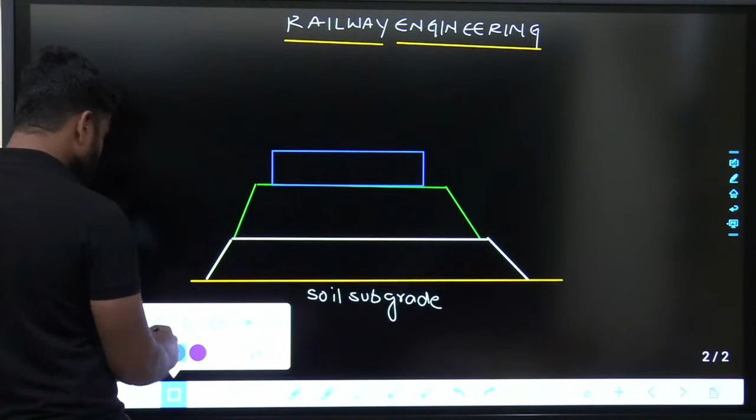on the top of soil subgrade there will be formation. Formation means indirectly there will be an embankment. On the top of the embankment there will be ballast. Ballast can be like this, or ballast can be in any way. It's not necessary that it has to be in the form of embankment. So this is ballast, and on the top of the ballast there will be sleepers. On the top of the sleepers, there will be rails.

Generally we go for flat footed rails. There will be I sections and there will be flat footed rails. So these are rails. Generally it will not be straight, it will be provided in the form of slope. This is sleepers, and this one is ballast. Sleepers are generally made up of concrete blocks, precast concrete, which we are using recently. Sleepers can be timber sleepers also, whatever the type of sleepers.

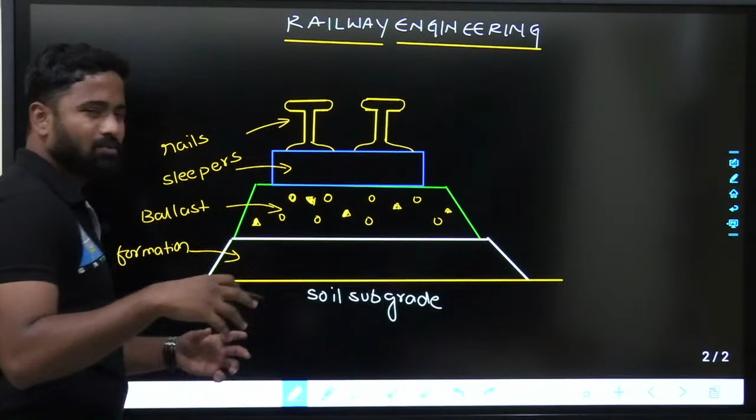This is the cross section of the rails. The rail would be like this; I am just showing the cross section. There will be ballast and there will be formation. Why is ballast provided? Ballast is provided from cushioning point of view. It is generally made up of boulders, gravel, all those things, and below that formation, that means you can provide soil subgrade or an embankment type of thing.

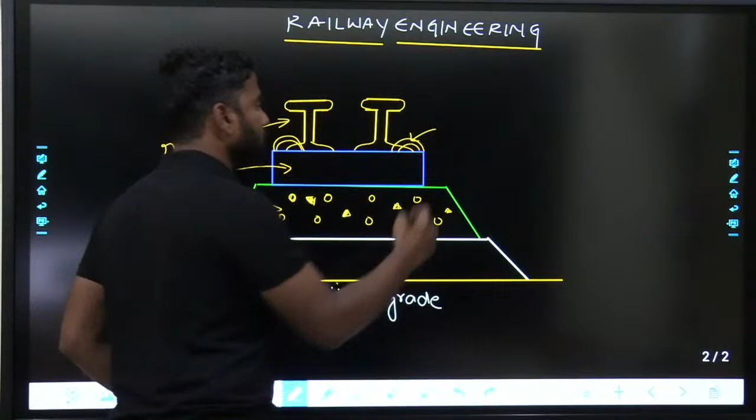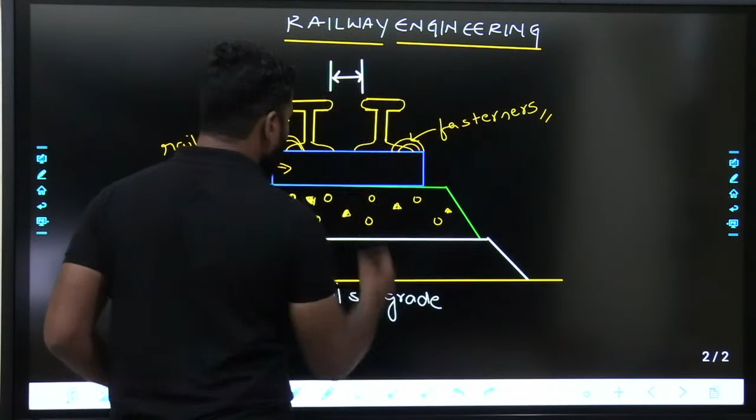On the top of it you are going to provide rails, and generally there will be fasteners between the rails and the sleepers, that means it is fixed to the sleepers. This is fasteners. And the distance between the inner face to inner face of rails, or running face, is called the gauge distance.

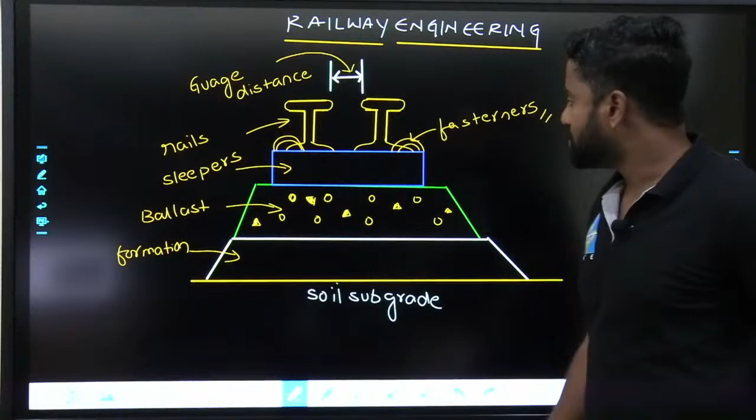Why is ballast provided? Ballast is provided for cushioning effect. Like when you sit on your bed or on a sofa, there will be some cushioning effect. So when a train comes on it, there should be some cushioning effect. That cushioning effect is provided by ballast, and sleepers are provided to hold the rails in position. So this is the cross section of the rail, and based upon the gauge distance. So what is gauge distance?

Gauge. It is the distance between inner face, or you can also say running face of the rails. It is the distance between inner face of the rails, or I can also say running face of the rails.

Based upon the gauge distance, the track is divided into several types. First one is broad gauge. So the gauge distance in meters, 1.676 meters. Broad gauge is generally given as BG. Next one is meter gauge, MG. The distance is generally 1.0 meters.

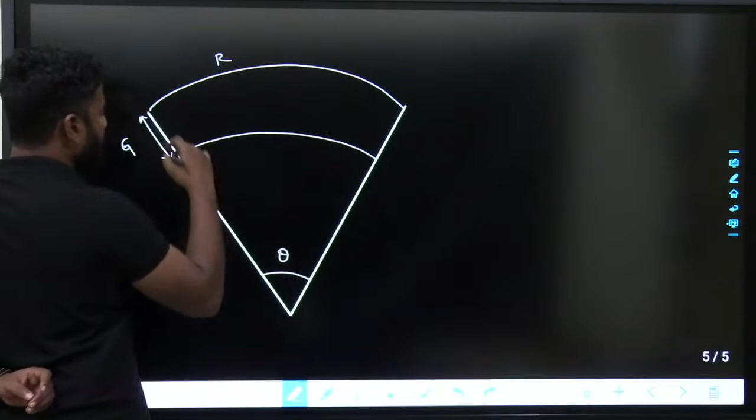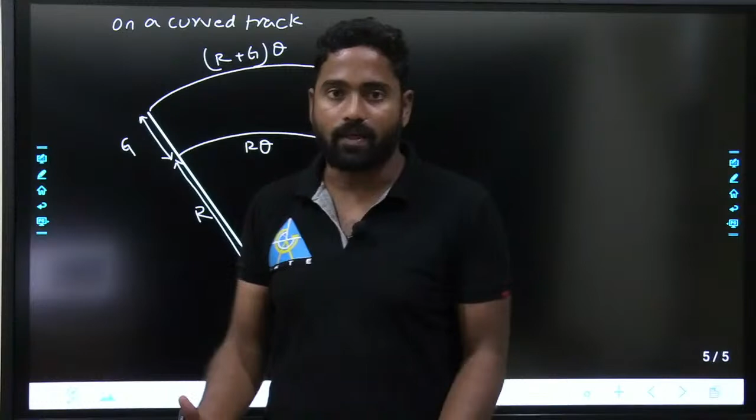Now if this is the radius r and this is theta, the distance traveled by this would be more. On a curved track, this would be (r plus g) times theta and this would be r times theta. So the distance traveled on the inner rail is less compared to that on the outer rail. You have to design it such that the distance on the inner rail is less and on the outer rail is more.

So what happens is, when the train is moving on a curved track, there will be centrifugal force. Whenever there is movement on a curved track, there will be centrifugal force acting outwards.

Centrifugal force will be acting outwards, right? So if centrifugal force is acting outwards, the wheels go like this. If the wheels go like this, then what happens? The smaller diameter D2 comes on the inner rail, and the larger diameter D1 goes on the outer rail. That means it moves like this. D2 comes on it like this and D1 moves out.

That means the diameter of the wheel on the outer rail would be D1, and the diameter of the wheel on the inner rail would be D2. D1 is more than D2, right? So if D1 is more than D2, the distance traveled on the outer rail is more than the distance traveled on the inner rail. Distance traveled is indirectly the perimeter, so pi D1 will be more than pi D2. So this satisfies the condition: the distance traveled on the outer rail should be more than the distance traveled on the inner rail.

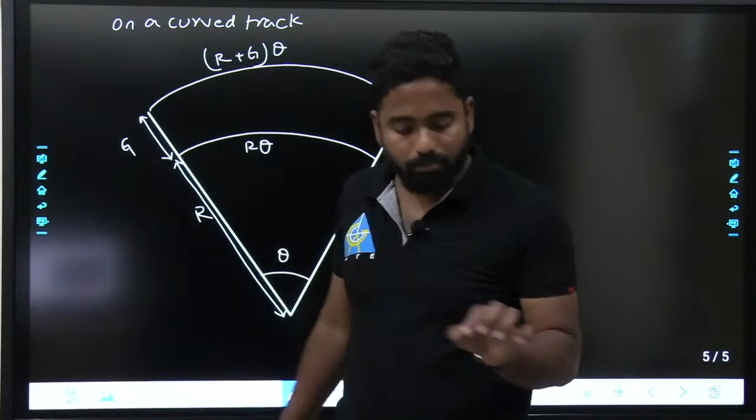When you see it in plan, when your wheel is going on the curved track, the distance traveled on the outer rail should be more than the distance traveled on the inner rail. This is satisfied only if we provide coned wheels. If we provide straight wheels, it will not move. The diameter on both will be the same and it gets stuck over there. Fine. That is the reason.

Coning of wheels is majorly provided keeping the curved track in mind. The distance traveled on the outer track should be more than the distance traveled on the inner track. That is the reason coning of wheels is generally done. The major part of this is satisfied by coning of the wheels, and some part is satisfied by skidding and slipping. Okay. So that is what happens on the curved track.

And on the straight track, what exactly happens? On the straight track, rigidity of the wheel comes into the picture. Let us say your train is going like this. There will be movement in the trains, right? The diameter of the contact at this point and at this point should be the same. If the diameter of contact is the same, then only it moves straight. Are you getting it?

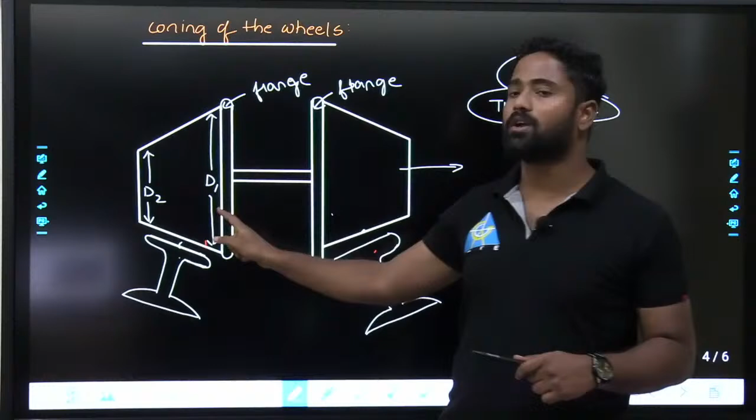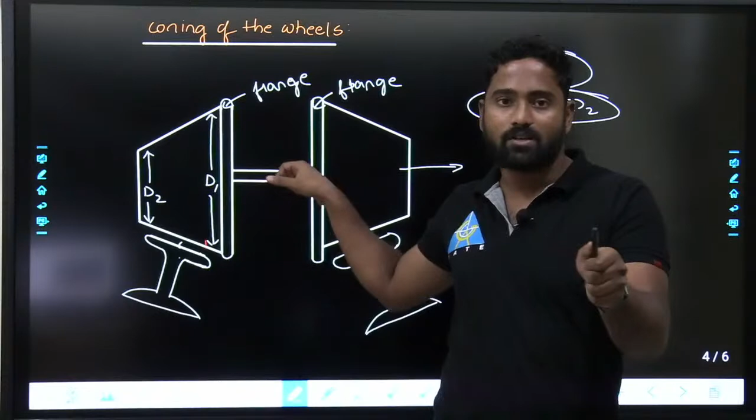If the train gets deflected sidewards, the diameter on one rail is more than the diameter on the other rail. That means this will try to move a greater distance compared to that one, so it tries to go like this. It is not flexible; this is a rigid axle. So the rigid axle pulls like this, and it slowly becomes straight. So that is the idea. On straight track, in order to avoid derailment, or to keep the wheel exactly at the center, we do the coning of the wheels.

So this is better understood if I show a video for you. It is on YouTube actually. There is a nice video here. Yeah, this video.

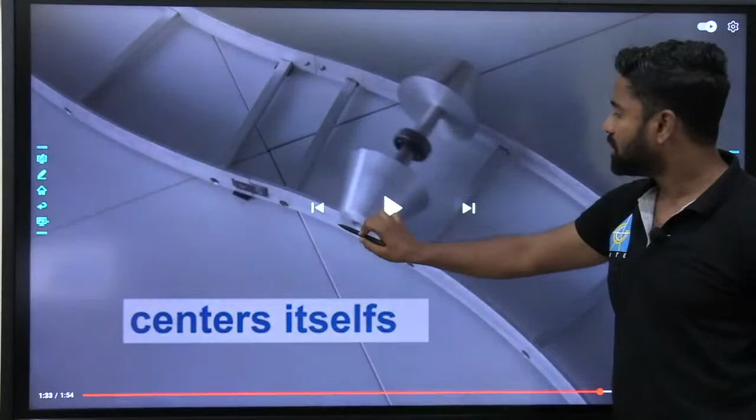And finally, if you are providing a conical tread with a rigid axle, meaning the axle is rigid and properly fixed, and it is coned like this, then you can see that if it is moving on a circular track, it adjusts itself. Are you getting it? So if you see here, on the outer rail the diameter will be more, and on the inner rail the diameter will be less, so that it can traverse the path easily. That is the idea. Fine.

So any doubts in this? You can ask me. Any doubts in this coning of the wheels?

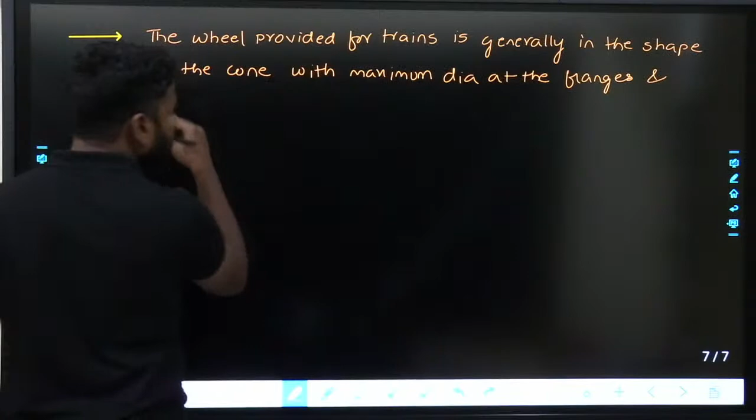With maximum diameter at the flanges, and minimum dia at the other ends. Purpose: on straight track.

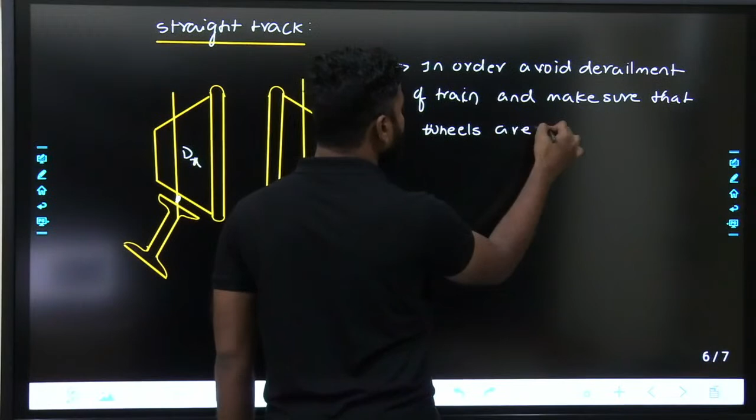On straight track, in order to avoid derailment of train and make sure that wheels are exactly at center. We make sure that wheels are exactly at the center.

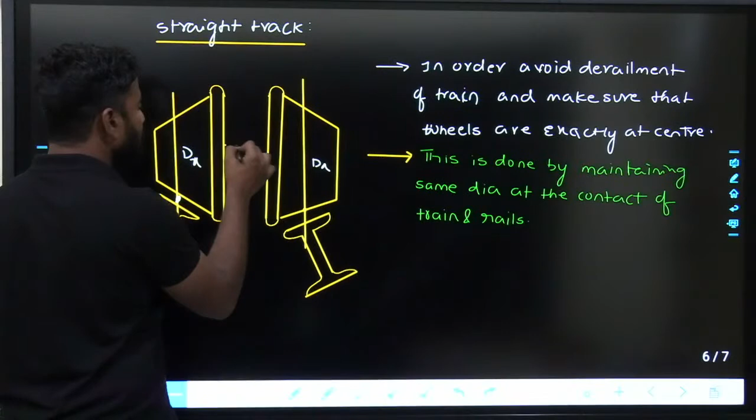How it is done? This is done by maintaining same dia at the contact of train and rails, and also due to the rigidity of the axle. This is the first purpose on the straight track.

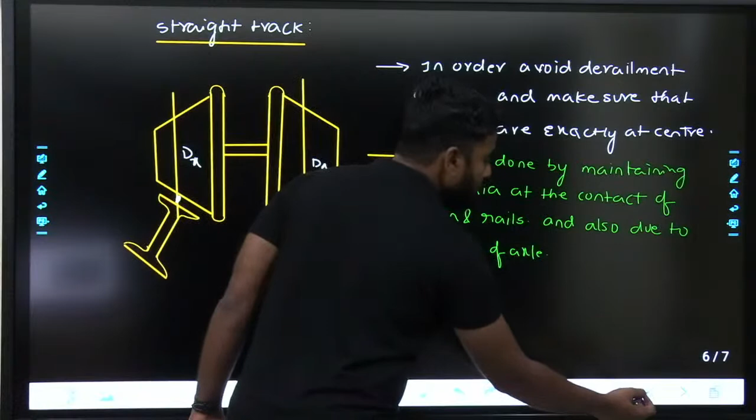And then on curved track, the major purpose is in order to make sure that distance traveled on outer track is more than distance traveled on inner track. Distance traveled on outer track is more than distance traveled on inner track.

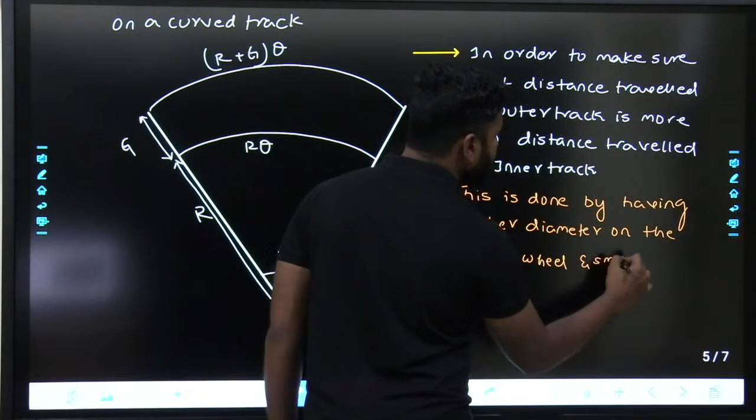How it is done? This is done by coning of the wheels. This is done by having higher diameters on the outer wheel, and smaller diameters on the inner wheel. On the inner wheel means on the contact of inner wheel.

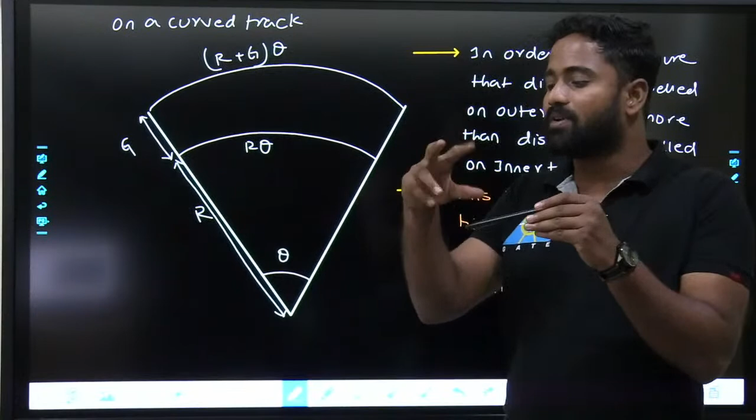Okay, smaller dia on the inner wheel and larger dia at the outer wheel. When it is moving like this, on the outer wheel there will be larger diameter, on the inner wheel there will be smaller diameter. And there are other purposes also, that it avoids wear and tear of the rails. Wear and tear means rubbing effect would be very less. If you provide cylindrical tread, the area of contact will be more, so wear and tear would be more, whereas here the rubbing effect would be less.

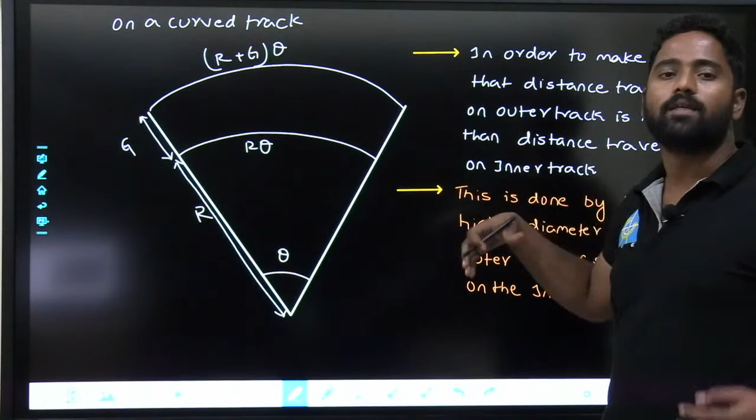Fine. So only a part of this is satisfied by providing different diameters. The other part will be satisfied by the skid and slip. So these are the major purposes of the coning of the wheels. You can take another note point also here. It is provided in order to reduce wear and tear of rails and wheels. Fine. Any doubts in this? You can ask me.

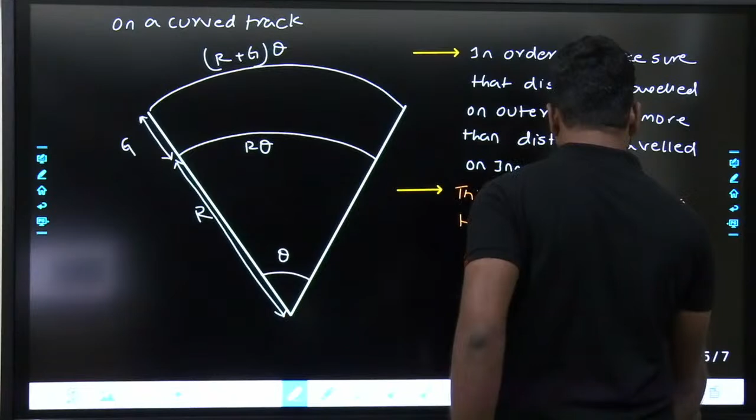Rahul Gupta, rail slope. Rail slope is the same as that of cone slope, and generally what is the cone slope? Slope is 1 in 20. Rail slope is also 1 in 20. Fine. This slope is also 1 in 20 and this slope is also 1 in 20. Any doubts? Any doubts, guys?

Any doubts, guys? No doubts? Fine. So this is coning of the wheels.

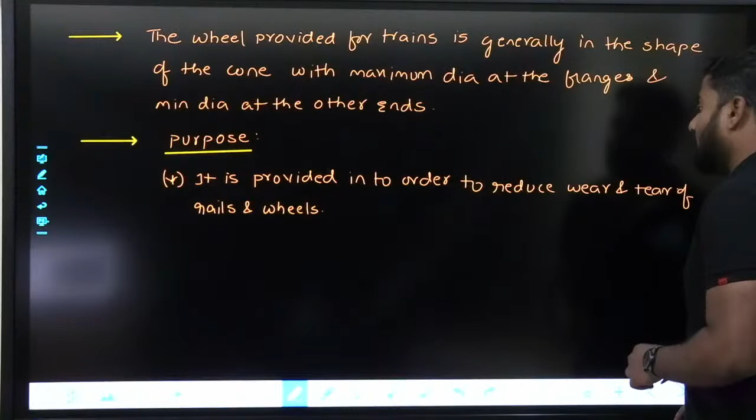Next one is long welded rails. LWR. Long welded rails, short welded rails. What are these things? From exam point of view, I am discussing only one thing, that is long welded rails. Generally, what is the length of the rail? Length of the rail would be approximately 12.8 meters, 13 meters. Generally available length is 13 meters. This is 1 meter, so 13 pieces of this, like 13 meters.

One rail is available in 13 meters, but your track will be for kilometers and kilometers. So generally what you will do is you will join one rail with another rail. When you are joining, the joints are the weakest points. Weakest point means when load is applied at the joints, there can be failure. So we have to make sure that there will not be any failure at the joints.

So what we do is we generally weld it properly, so that both the rails will act like a single unit. So joints we generally try to avoid by welding. Fine. So long welded rails are provided for track of long length. So that is long welded rails.

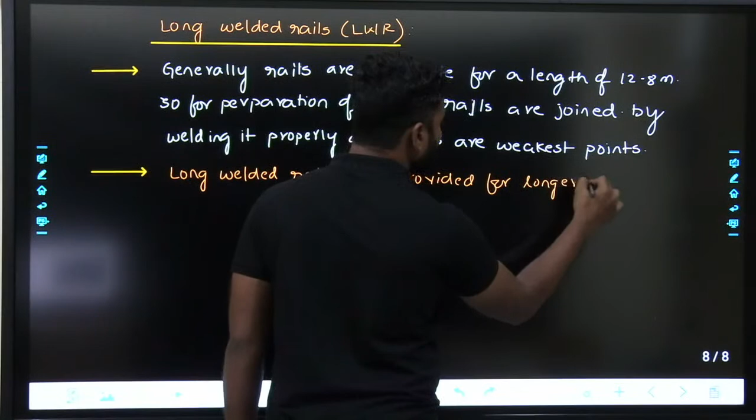As joints are weakest points, those are welded properly. And long welded rails are provided for longer lengths.

And if there is a joint, then because of increase in temperature, there will be temperature effects. In rigid pavement also we provided expansion joints and contraction joints, so that with a change in temperature it can expand or contract. But here those gaps are not provided, because rails are not allowed to expand or contract. They are welded properly. There will not be any gap between rail and rail, so no expansion is provided.

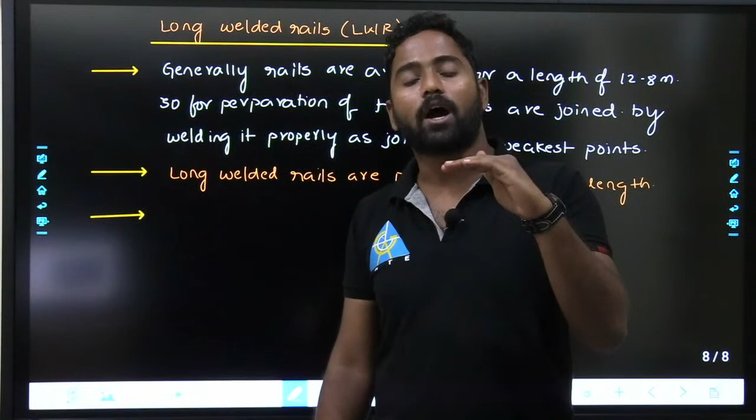If no expansion is provided, then stresses are developed. The stresses developed due to temperature are generally taken by sleepers and fasteners. The fasteners are connected to the sleepers. So a sufficient amount of sleepers is to be provided. Are you getting it? So what exactly I am trying to say is, let us say this is the track, these are sleepers.

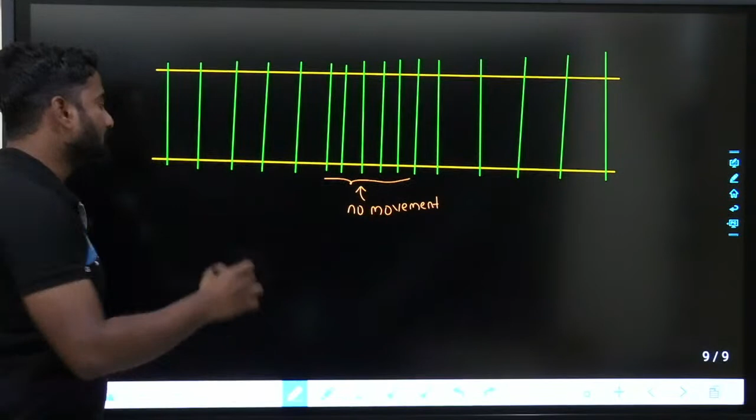Let us say you are providing long welded rails. At the central portion of long welded rails, there will be no movement, because more sleepers are provided. But at the ends of the long welded rails, there is possibility of expansion. That length is generally called the breathing length.

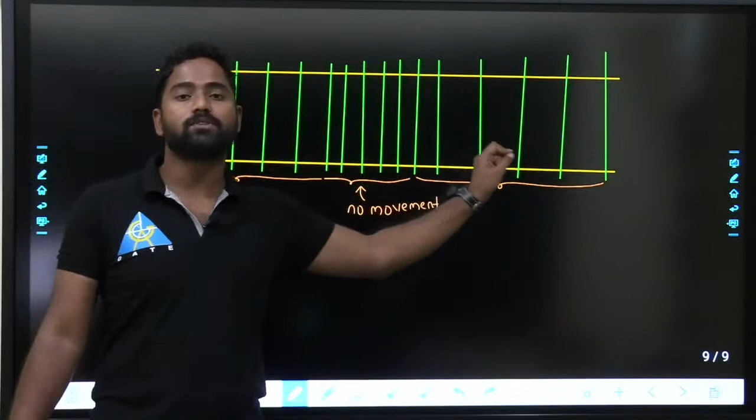There is possibility of expansion because the sleeper quantity would be less. So a sufficient number of sleepers should be provided, so that there will not be any expansion. L minimum. This is breathing length, and this is also breathing length.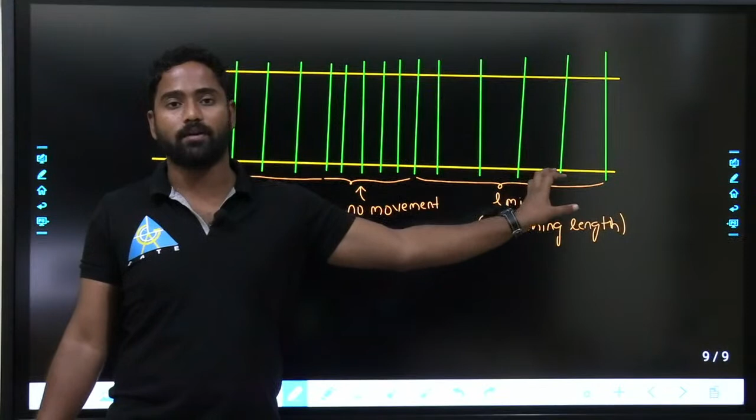So in the central portion there will not be any movement. At the ends, the possibility of movement is there. That movement is arrested by fasteners or sleepers, so a sufficient number of sleepers is provided to avoid the movement here.

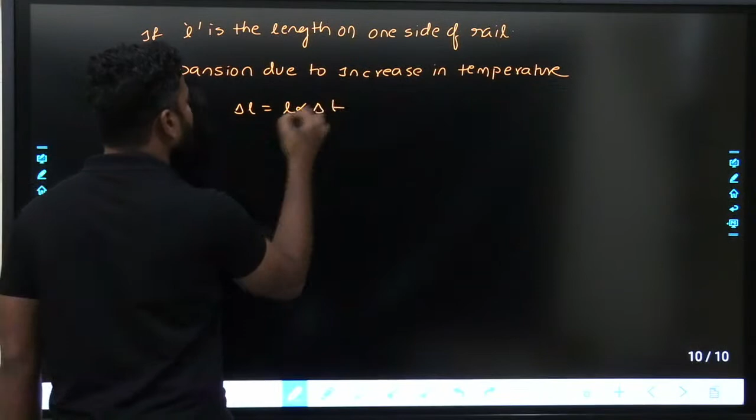If L is the length on one side of the rail, then the expansion due to increase in temperature, delta L, is given as L alpha delta T, or delta L upon L equals alpha times delta T.

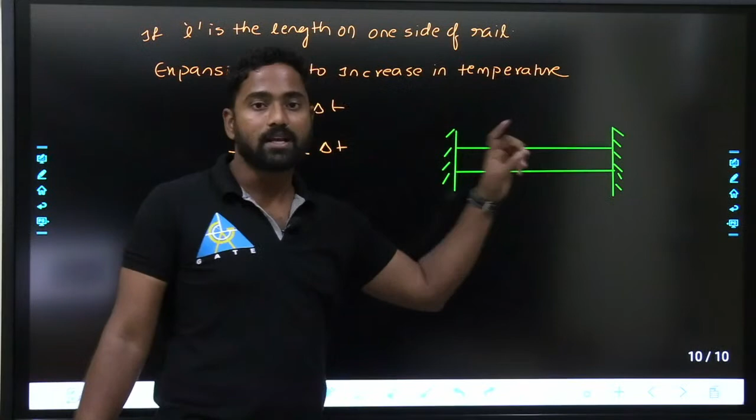Here it can't expand. As I told you in structural analysis, if you increase the temperature, a member tries to expand, but it can't because there are fixtures, it is indeterminate or fixed at the ends. If it can't expand, stresses will develop. Delta L by L equals alpha times delta T. This is strain. Strain equals alpha times delta T.

Then stresses will develop in it. The same thing here, the rail can't expand. Why? Because it is fixed. The rails are fixed to the sleepers. Fine. That means stresses will develop. This stress is taken by the sleepers.

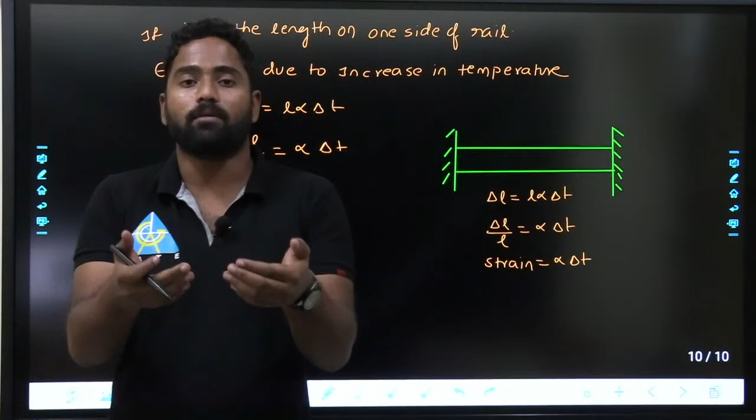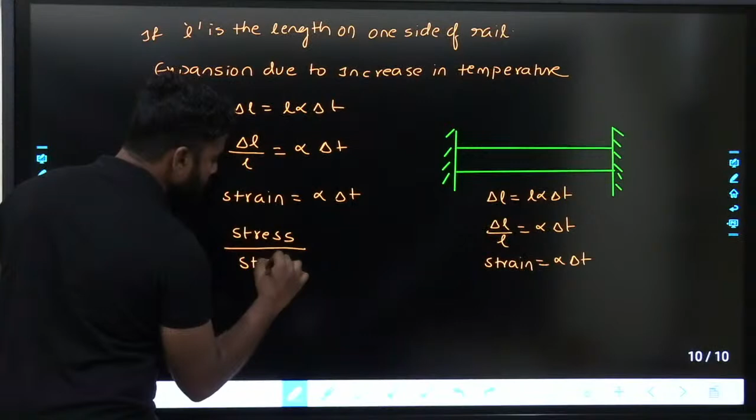So delta L by L equals alpha delta T. Strain equals alpha times delta T. Stress upon strain, as per Hooke's law, stress upon strain equals E. Fine. So from this, stress equals E alpha delta T. The stress that should be taken is E alpha delta T.

If cross sectional area of rails equals A, then force developed P equals A multiplied with the stress that is developed. So that is A multiplied with E alpha delta T. So this is equal to E A alpha times delta T. This is the force that is developed. So P equals E A times alpha delta T.

Cross sectional area we know, and Young's modulus we know. Alpha is the coefficient of thermal expansion, delta T is the change in the temperature, right? This is the force that is developed because of change in temperature. This is to be resisted by sleepers.

If, let us say, one sleeper can resist a force of R newtons, R kilonewtons, whatever it is. One sleeper can resist a force of R kilonewtons or R newtons.

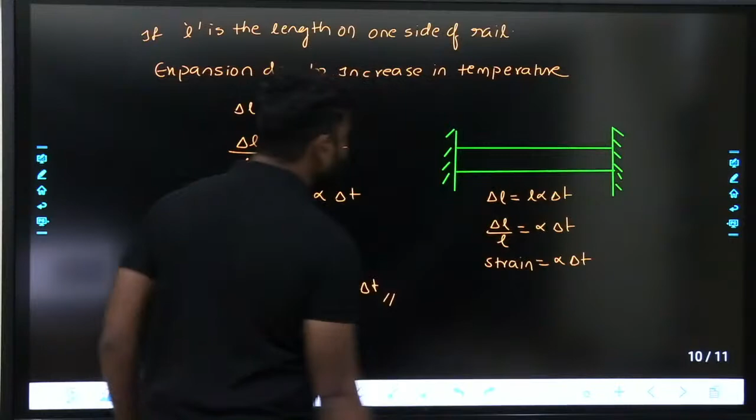Then minimum length, L minimum, so that there will not be any expansion. L minimum on one side. If you ask me L minimum on one side, how will you calculate? If number of sleepers is N and S is the spacing between the sleepers, L minimum would be equal to N minus 1 into S.

On this side also, L minimum equals N minus 1 into S. So if N is the number of sleepers, then L minimum equals N minus 1 into S, where S equals the center to center spacing between the sleepers. Fine. L minimum is N minus 1 into S.

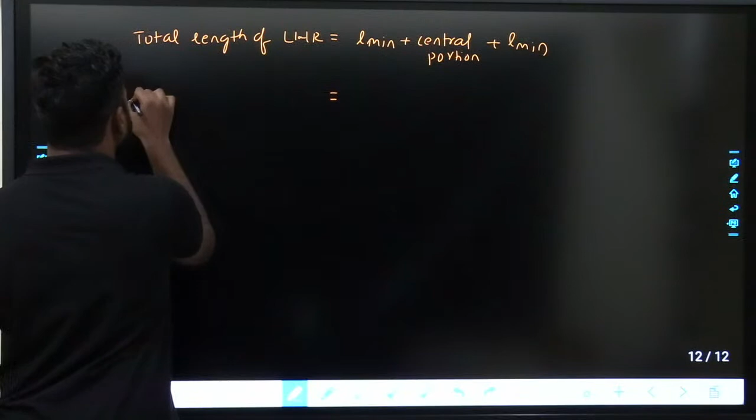Now what is the total length of long welded rail? Total length of long welded rail would be equal to L minimum plus central portion plus L minimum. Fine. So if central portion is 0, then it is the minimum length of LWR. The minimum length of LWR would be equal to 2 times L minimum, that is 2 times N minus 1 into S. Fine.

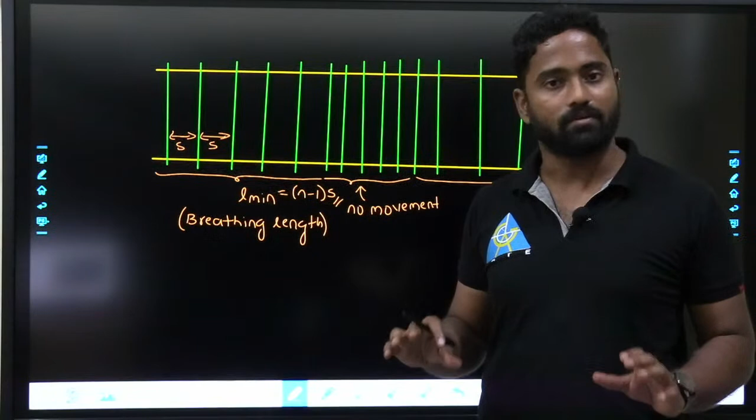So central portion 0 means that is the minimum length. If 2 times L minimum you are providing, L minimum on this side, L minimum on this side, there will not be any expansion of the rails. All the stresses that are developed will be taken by the sleepers. Fine.

If central portion is also provided, this is the central portion, right? Generally, there will not be any movement or any stresses developed in the central portion. All the stresses are developed at the ends only. If they are asking minimum length of long welded rails, then it is 2 times L minimum, 2 times breathing length.

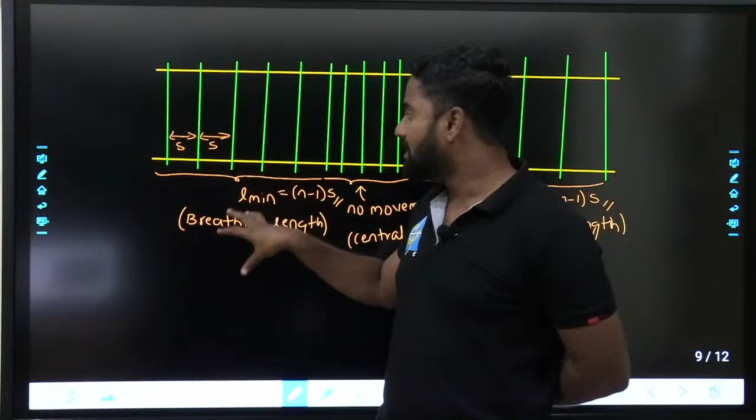What is the breathing length? Breathing length is the minimum length where the expansion of long welded rails can occur. That means indirectly the stresses can occur. So proper number of sleepers is to be provided over here in order to avoid the stresses that are developed, or to avoid the expansion of the rails. That is long welded rails.

Any doubts in this? You can ask me. Any doubts?

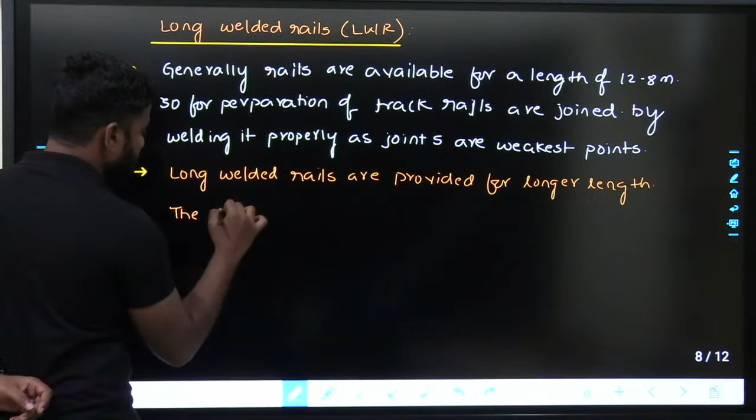So the stresses develop due to temperature variation. Stresses developed due to temperature variation are generally taken by sleepers through fasteners.

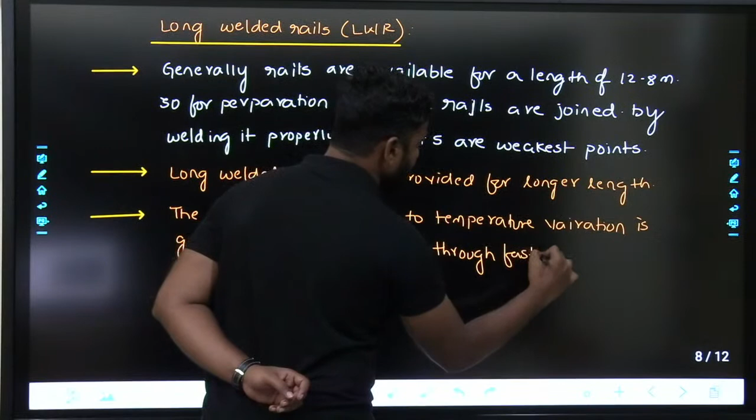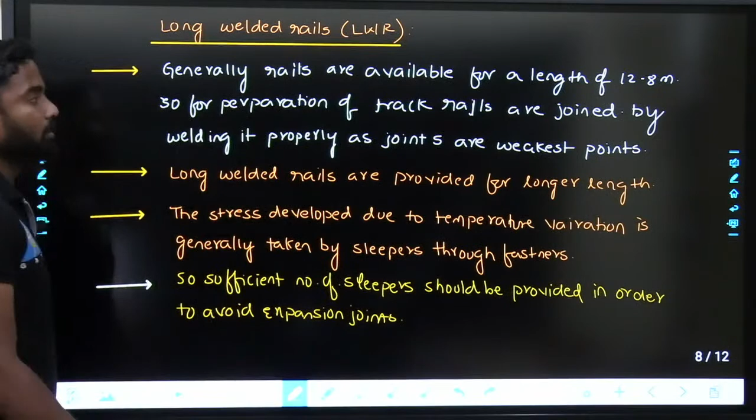So sufficient number of sleepers should be provided in order to avoid expansion joints. Fine. Next one is breathing length.

It is the minimum length of rails provided on both sides in order to avoid expansion of rails. That means if you provide this much length of the rails, then there will not be any expansion. No expansion means no stresses, or if stresses or forces also developed, that can be easily taken by the sleepers. Fine, that is the meaning of it.

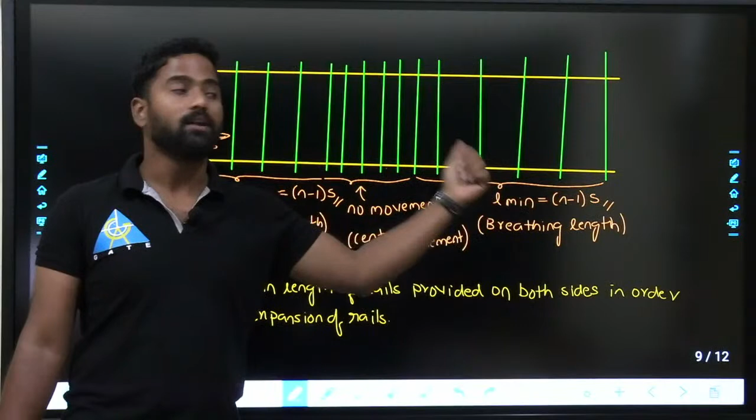Any doubts in this? You can ask me. Even the basic doubts, you can go ahead and ask me. So minimum length of the LWR in the examination they ask, that is 2 times L minimum.

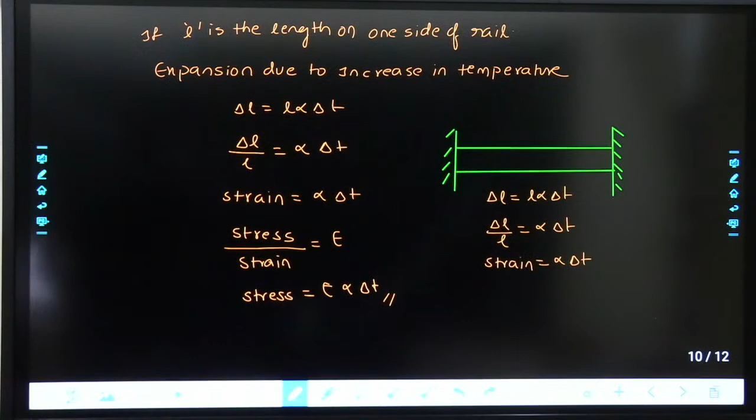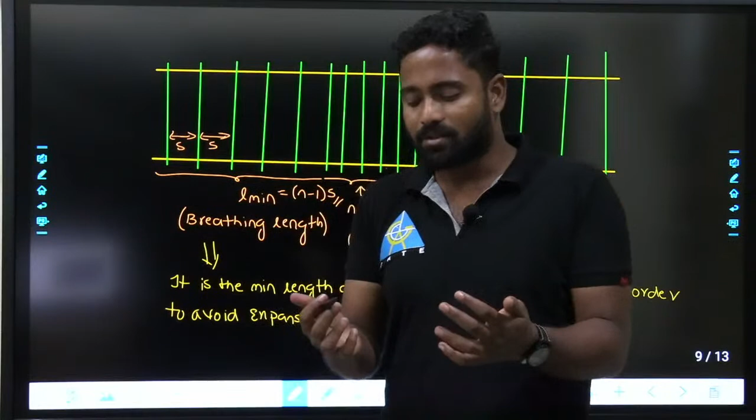Narendra, what is your doubt? Sir, how to define the central no movement zone? Central no movement zone means here you are providing sufficient number of sleepers. If you need 10 sleepers, you will provide 20 sleepers over here, so that you don't have to worry about expansion, contraction. After the central portion, you reduce the number of sleepers on this side.

You can't provide more sleepers, right? So at least you should provide the minimum number of sleepers so that there will not be expansion or contraction. Generally, we remove this central no movement zone. We provide two rails, L minimum, L minimum, so that equal sleepers will be provided. But if you want to be safer, you will provide a central zone also.

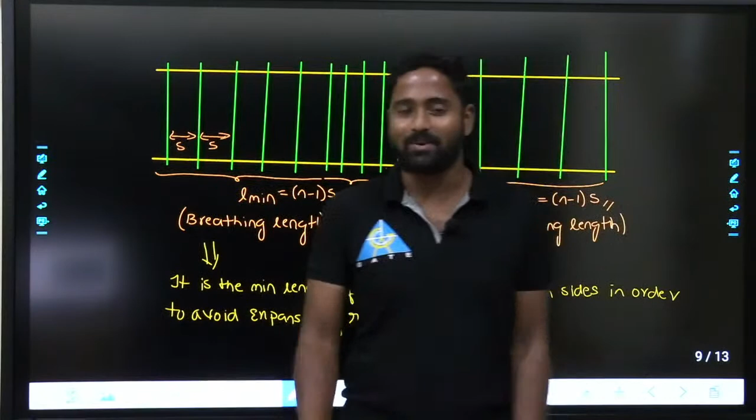If you have not seen, I can't do anything. Go and see in the new rails or in the metro rails, you can see that there will be weldings. Bolts, if you are seeing, those are old rails. Generally, we don't modify the rails frequently. Any doubts up to here?

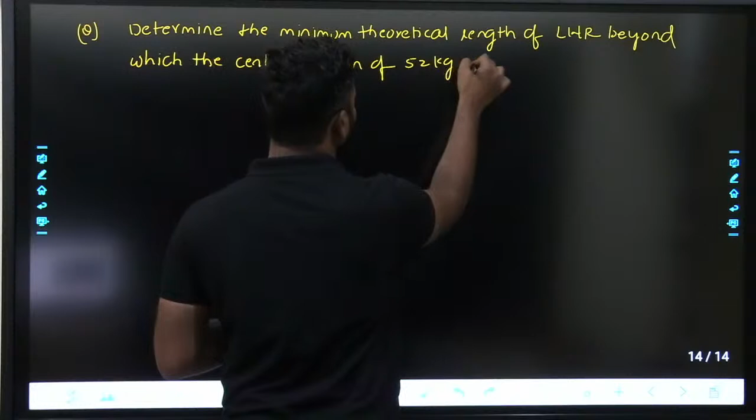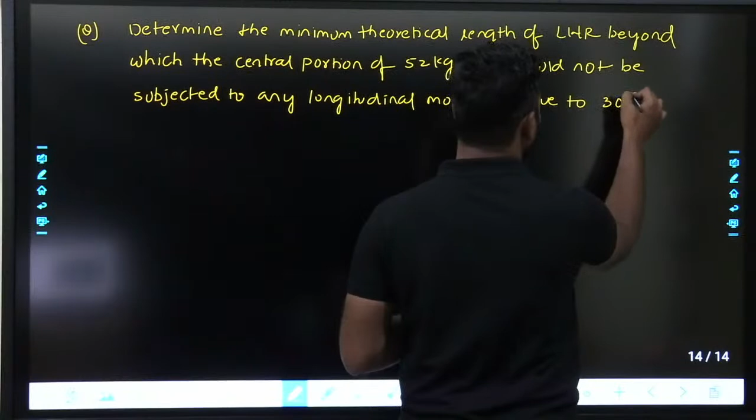Please take a question. Determine the minimum theoretical length of LWR beyond which the central portion of 52 kg rail would not be subjected to any longitudinal movement, due to 30 degrees centigrade temperature variation.

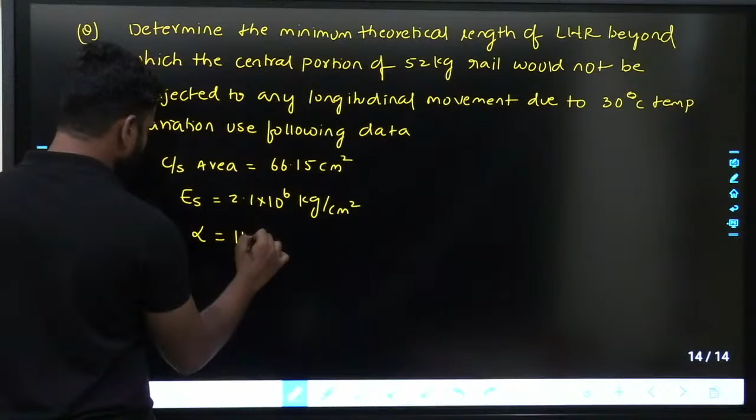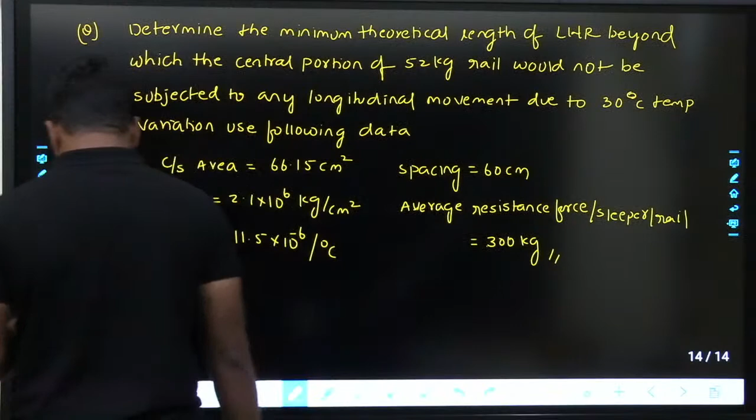Use following data. Cross-sectional area equals 66.15 centimeter square. E is 2.1 into 10 to the power of 6 kgs per centimeter square. Alpha equals 11.5 into 10 to the power of minus 6 per degree Celsius. Spacing equals 60 centimeters. Average resistance force per sleeper per rail equals 300 kgs. Please try to solve this question.

You have also seen bolt joint. Generally you see that because our rails are very old. In the new rails you don't see that as frequently.

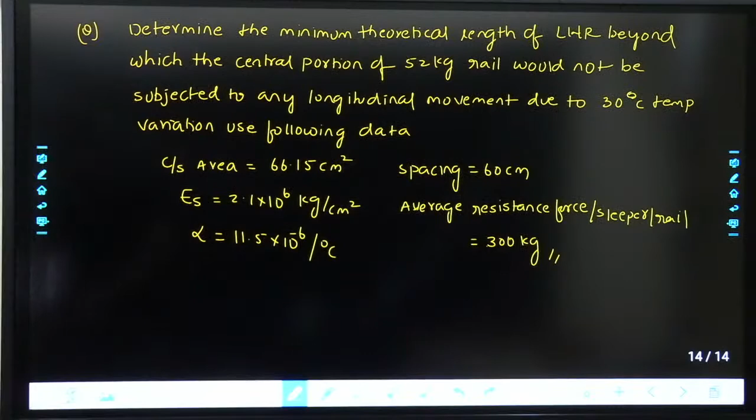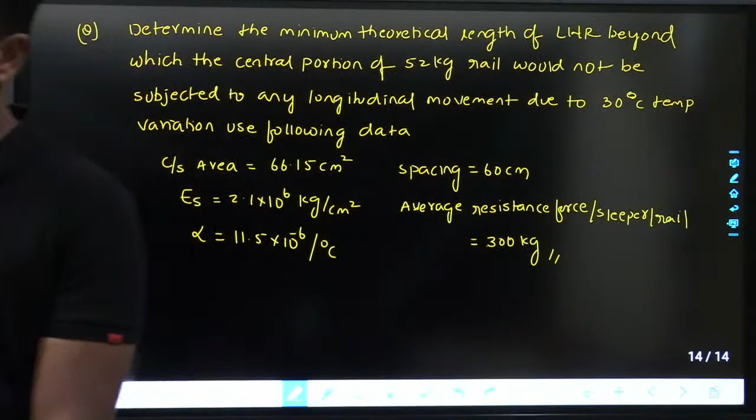Kushbu ja clear. What is the answer, guys? Try to solve, make it fast. Everything is clear, it's just application of formula, right? So P equals to A E alpha delta T. So A is how much? 66.15 centimeters square, I think they have given.

E is 2 into 10 to the power of 6, or 2.1 into 10 to the power of 6. Alpha is 11.5 into 10 to the power of minus 6. Delta T is 30 degrees Celsius temperature variation. What is this value? P value will be getting in kgs, right? What is the answer?

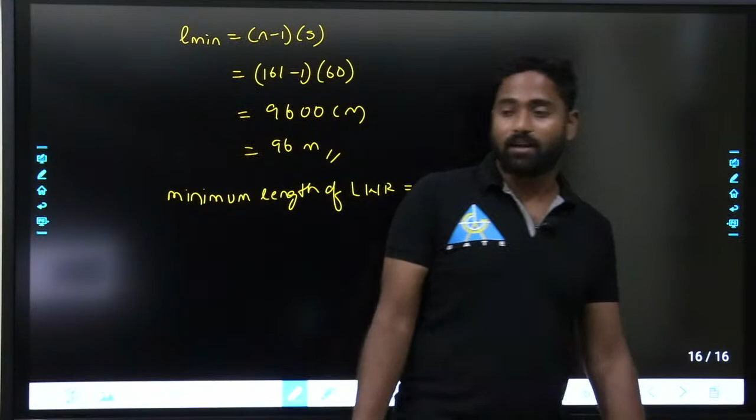Length of the rail is 13 meters. Long welded rail means I'll keep on welding it, so that I'll prepare a 192 meters bigger length. Another 192 meters, and then I'll join both. So in this 192 meters, there will not be any expansion. That is how it is made.

Be clear, you will join every 13 meters to develop a 192 meter bigger thing. Another 192. These two will be connected by bolts or welding, whatever it is. In this 192 meters, and in another 192 meters also, there will not be any expansion due to change in the temperature. That is the idea. Now, is it clear, guys?

Fine. Next one is sleeper density. Sleeper density is defined as number of sleepers provided for one rail length. One rail length generally would be approximately 13 meters or 12.8 meters. For 12.8 meters length, how many sleepers you are providing? That is called as sleeper density.

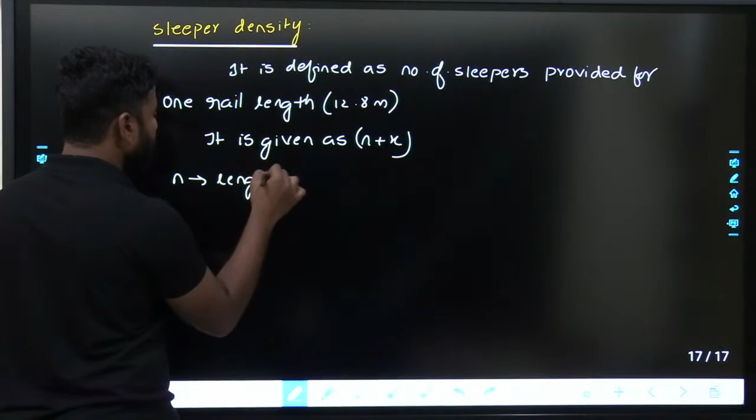It is given as n plus x, where n is the length of the rail and x is the value. Generally n is 12.8 meters. If nothing is mentioned in the question, you will take it as 12.8 meters. If they mention 26 meters, take 26 meters. If they mention 30 meters, take 30 meters. That is the idea.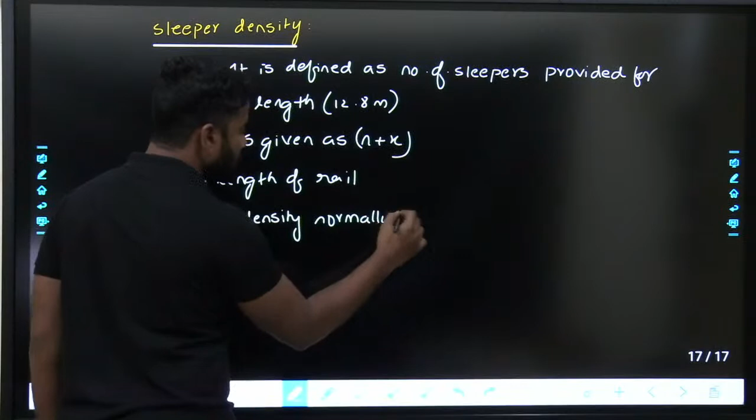Sleeper density normally varies between n plus 3 to n plus 6. That means 13 plus 3 is 16, or 13 plus 6 is 19. That is how sleeper density varies. Fine. Any doubts in this? You can ask me. No doubts? Fine.

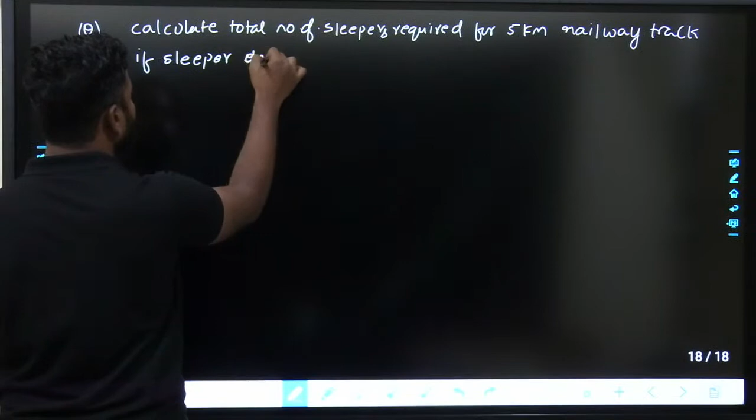So the question is: calculate total number of sleepers required for 5 kilometer railway track if sleeper density is n plus 5 for a broad gauge track.

Okay, so please, what is the answer? Please give me the answer. Okay, clear? Thanks.

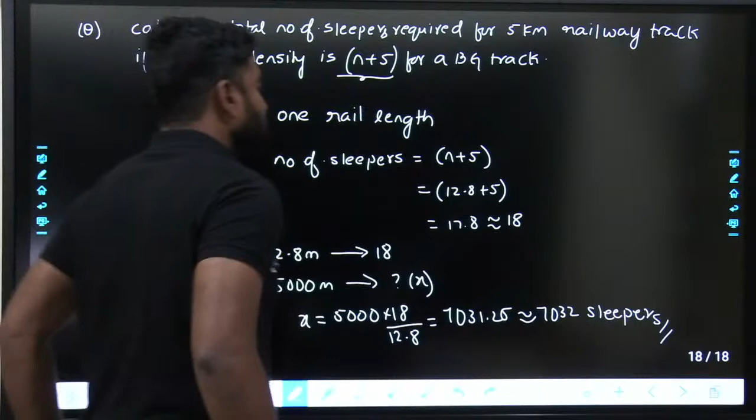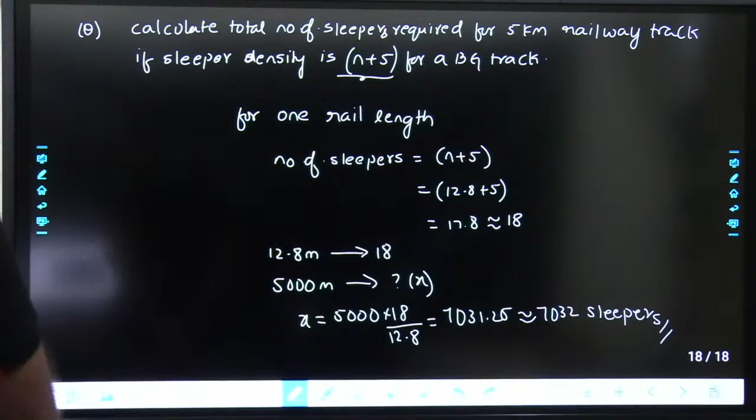No doubts? Fine. Next one is depth of ballast cushion. How you are going to find out depth of ballast cushion, right? So let us say there are rails. I am showing you the elevation. There is rail over here, and there will be sleepers. And there will be ballast.

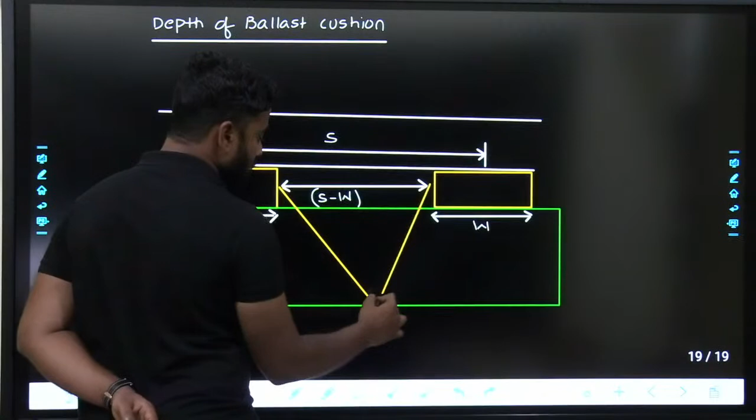Center to center spacing between the sleepers, let us say this is S. Width is W. If this is W, this is W, then what would be this length? This would be S minus W by 2, W by 2. So this would be S minus W. Generally the effect of rails would be up to 45 degrees from here. This is 45 degrees.

If that is 45 degrees, then what would be this depth? This distance would be S minus W upon 2, so this will also be S minus W upon 2. So as per the code, we will be taking this as the 45 degrees dispersion. This is ballast. So minimum depth of ballast cushion is generally given as this.

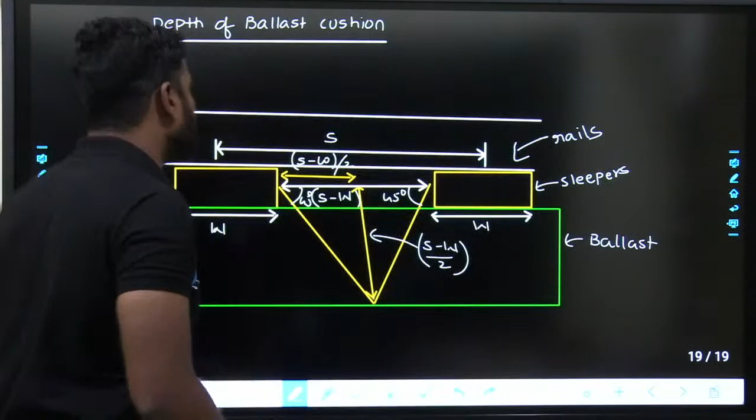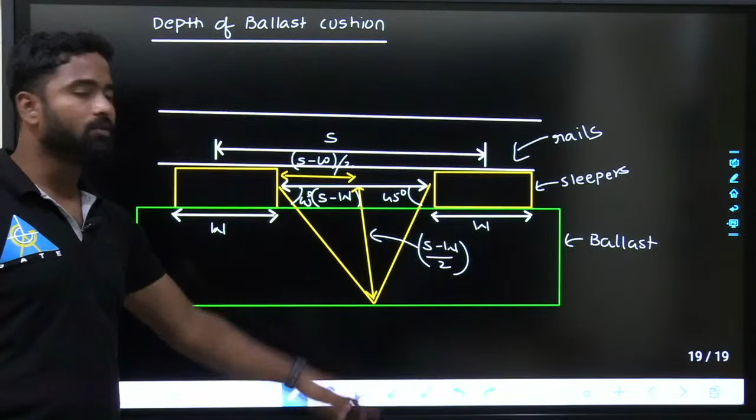These are sleepers, and these are rails. I am showing longitudinal view, not cross section. There is a rail. Below the rail there are sleepers, and below the sleepers there is ballast. Ballast will be in this one also, but the minimum depth of the ballast cushion is taken as S minus W by 2.

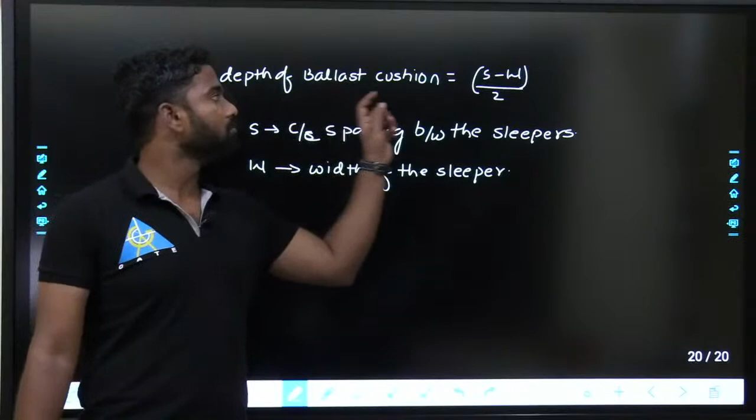Minimum depth of ballast cushion equals to S minus W upon 2, where S is center to center spacing between the sleepers, and W is width of the sleeper. So minimum depth of ballast cushion is S minus W upon 2. Fine. So any doubts in this you can ask.

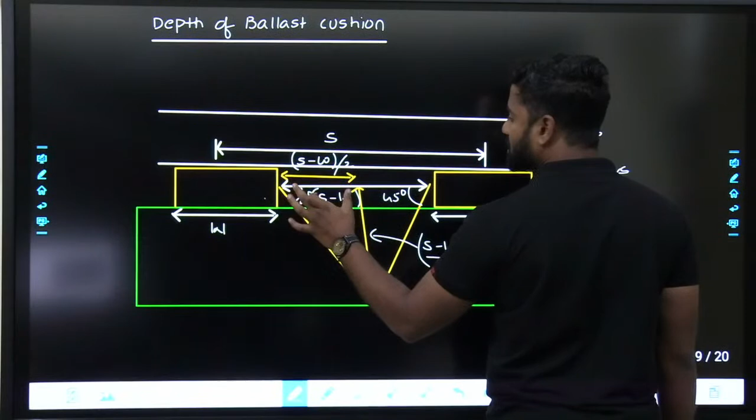S minus 2W? No, Kushbu, it's not S minus 2W, it's S minus W. W by 2 here, W by 2 here. S is center to center, not from this end to this end. If I add, the whole thing would be W. So from here to here, it is S minus W, and this distance will be S minus W upon 2. So this is how you find out depth of ballast cushion, the minimum depth you have to provide so that there will not be any problem.

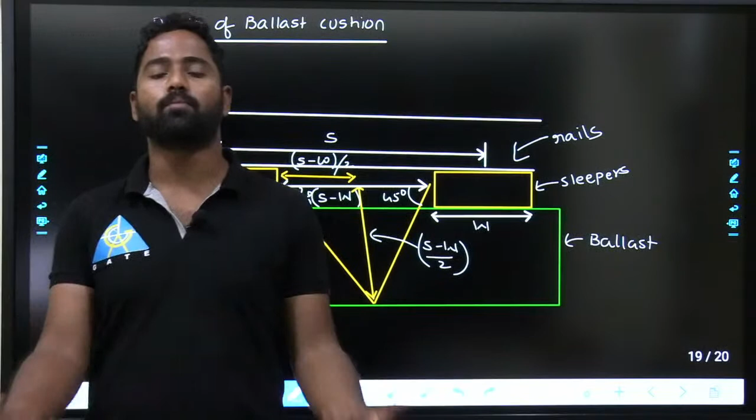Okay, fine. So I wanted to start geometric design of railways, but I'll start it fresh tomorrow. It takes some 2 to 3 hours of time, so I'll complete geometric design of railways, then only I'll leave tomorrow. Don't worry about it.